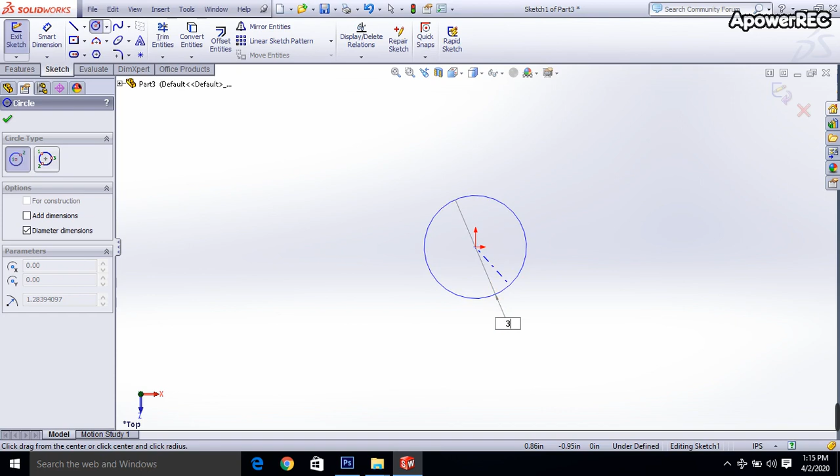Today I'll show how to make a mug in SolidWorks software. So at first I am taking the top plane, then Ctrl+8, then go to the sketch and select the circle, and the radius of the circle will be 3 inch. Done. Then close the drawing, go to the features and select the extruded boss, click on the circle and height will be 3 inch, then enter, again enter.

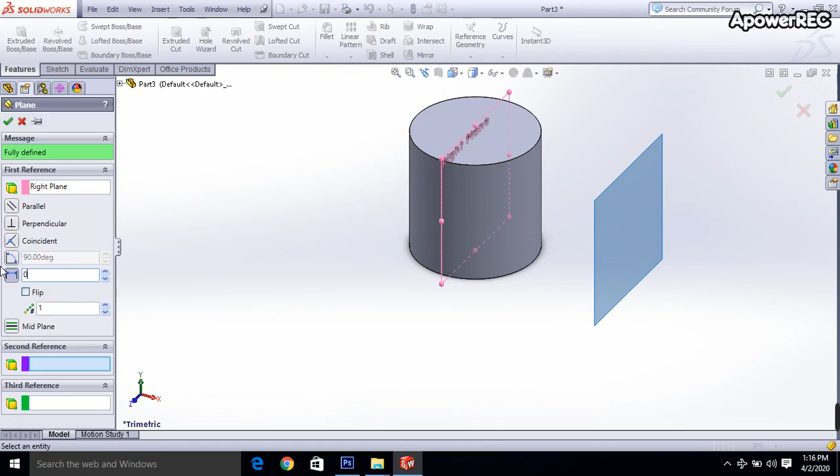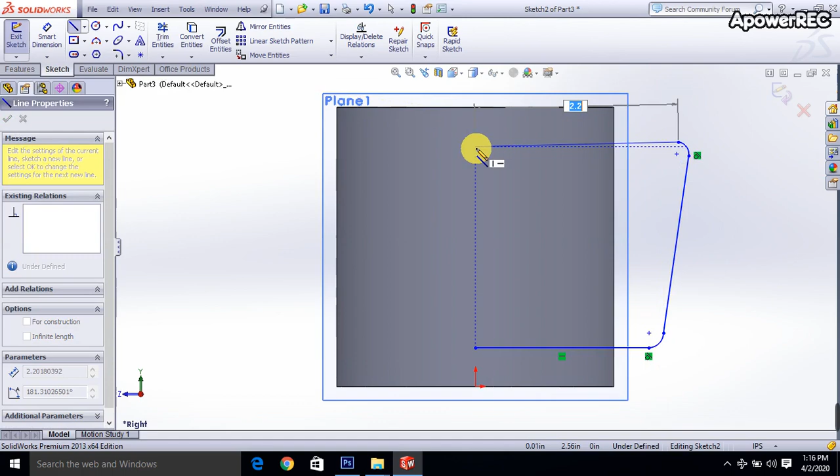Then go to the right plane, the reference geometry, plane; it will start from 0 inch. Okay, done. Then Ctrl+8, then go to the sketch and select the line, draw a line, go to the initial point. Okay, then another click, go and come to the initial point, another click, another click. Okay, done. Close the drawing.

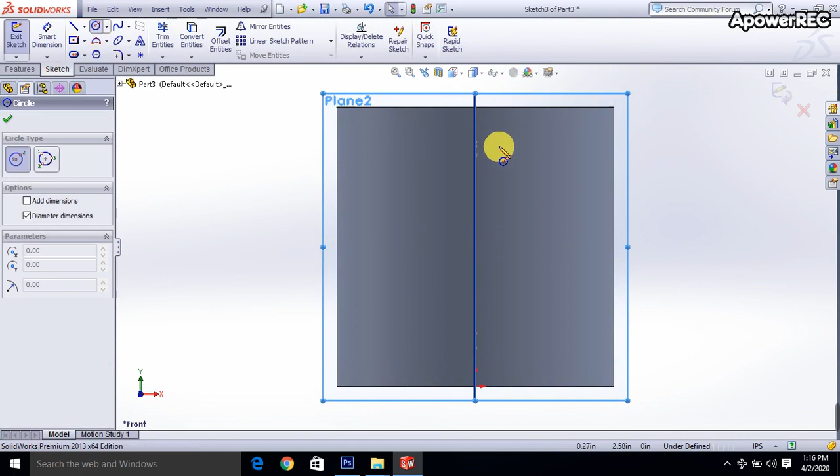Then go to the front plane, features, to the reference geometry plane, start from 0 inch, click here, the sketch, Ctrl+8 and select the circle, draw a circle, fill 0.25, enter, close the drawing, Ctrl+7, go to the features, select the swept boss, click on this circle, another click on this path. Okay, done.

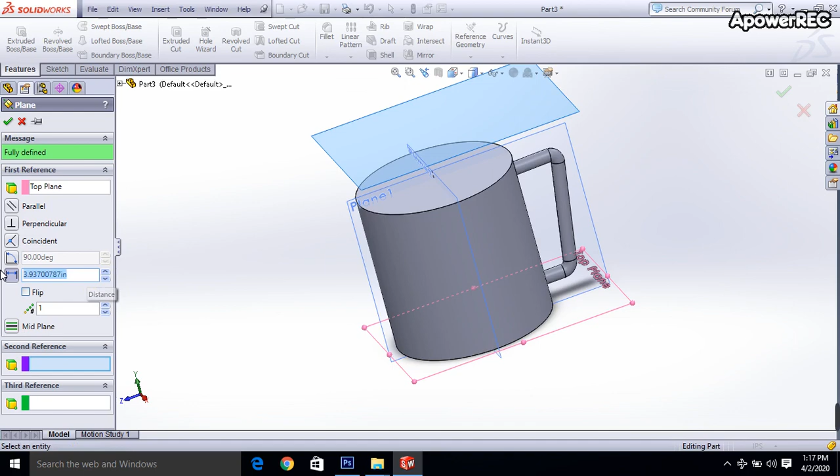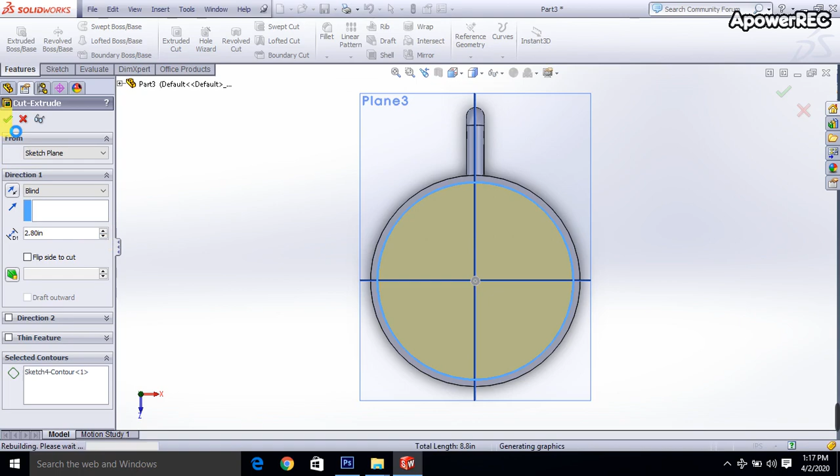Then I am selecting again the top plane, go to the reference geometry, select the plane; it will start from 3 inch. Okay, then Ctrl+8, then go to the sketch, select the circle, draw a circle whose radius will be 2.8 inch, close the drawing, then go to the features, select the extruded cut, click on this circle, the height will be 2.8 inch, enter. Okay, then the mug is ready.

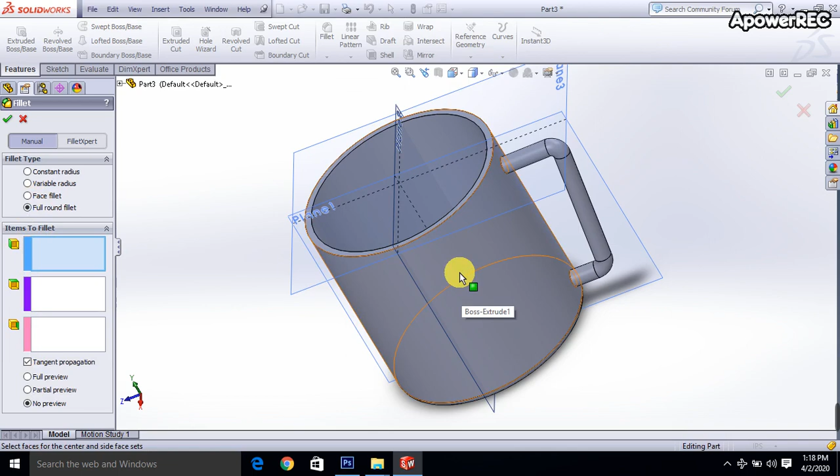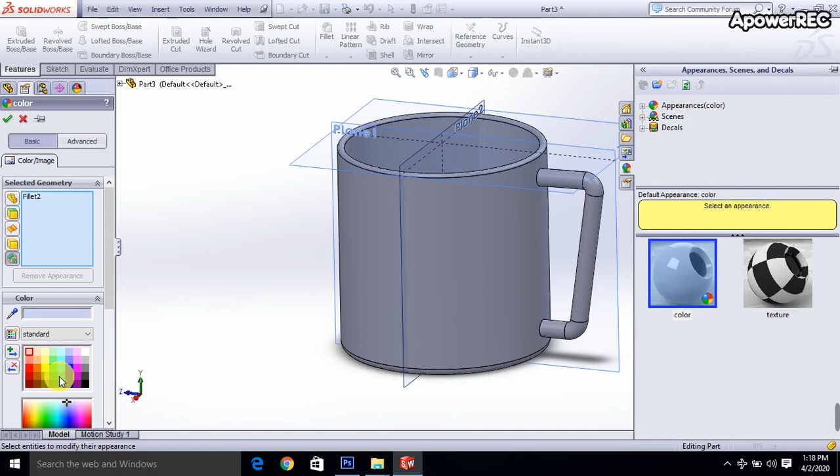We can select the fillet and the constant radius, it will be 0.1 inch. Okay, then I am selecting again the fillet and full round fillet, click, one click is here, select here, another click is here, here, and it is delete, then here select it and here, then close. Okay, the mug is ready. Then we can change the color, go to here and select the color. Okay.